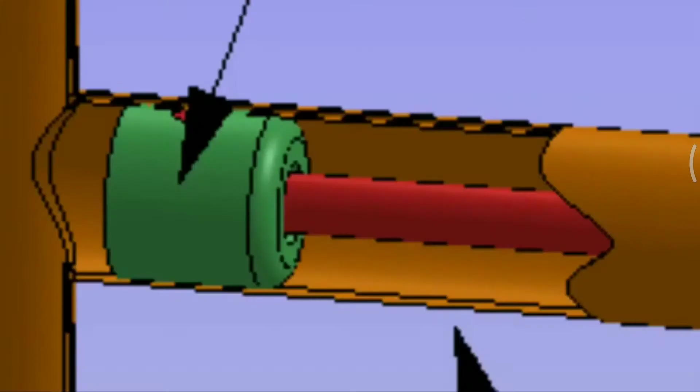Reciprocating pump is a positive displacement pump which comes in various varieties such as piston type pump, diaphragm type pump and plunger type pump. This type of pump is suitable where the low volume of flow and pressure is required to be high.

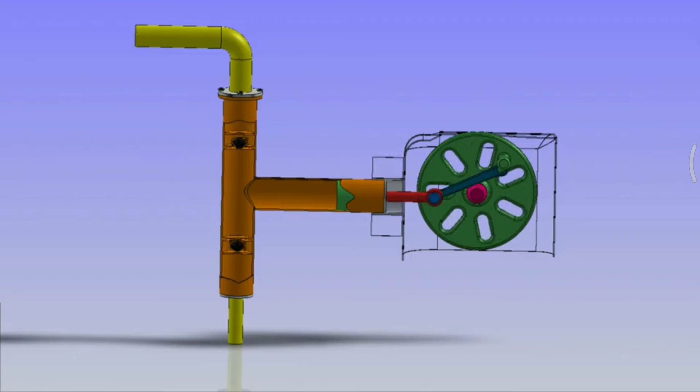This pump consists of suction pipe, suction valve, delivery pipe, delivery valve, cylinder, piston and connecting rod assembly, strainer and air vessel. Suction pipe connects the source of liquid to the cylinder, and the liquid is sucked by the pipe from the source to the cylinder.

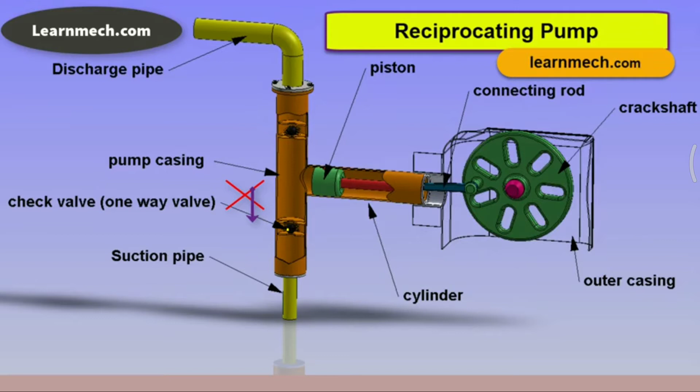Suction valve is a non-return valve, which means only one direction flow is possible in this type of valve. This is placed in between suction pipe inlet and cylinder. During suction of liquid it is opened, and during discharge it is closed.

Delivery valve is also a non-return valve, placed between cylinder and delivery pipe outlet. It is in closed position during suction and in opened position during discharge of liquid. This pump works on the principle of a slider crank mechanism.

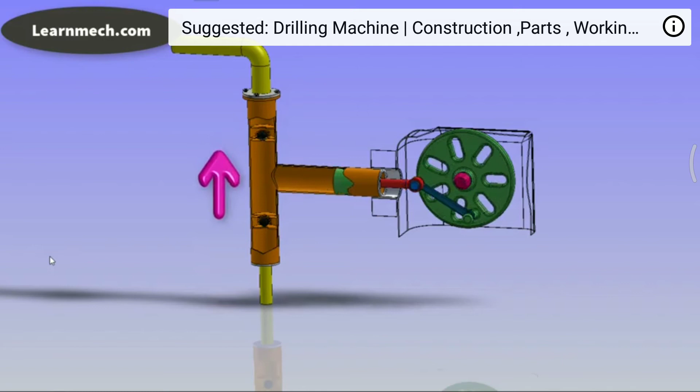Cylinder is used to suck water and deliver it to the desired location. The piston executes reciprocating motion within the cylinder. Piston is connected to the crankshaft through a connecting rod. An external power source is used to drive the piston within the cylinder.

As the piston moves backward, it sucks the liquid into the cylinder, and when it moves forward, it delivers the water from the cylinder to the required location.

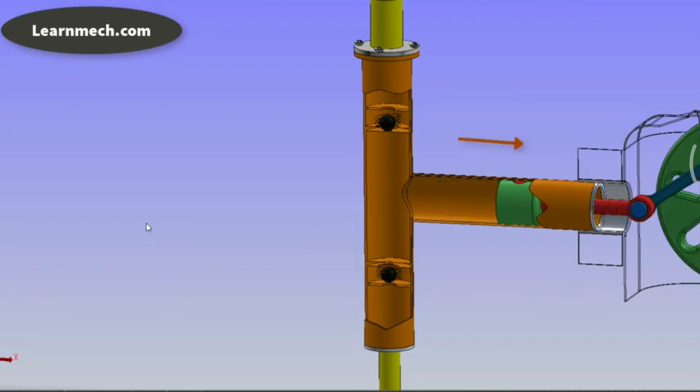During the suction stroke, the piston moves backward and opens the suction valve, making the water enter into the cylinder. During suction, the delivery valve remains closed and no water is discharged through it.

After the suction stroke, the piston moves forward. During this, the delivery valve gets open and the suction valve comes into closed position.

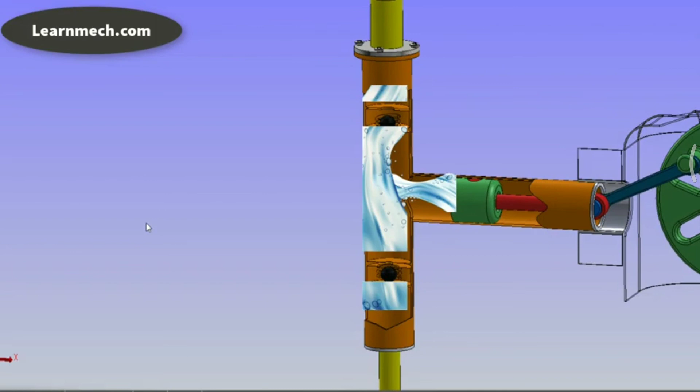As the piston moves forward, it applies thrust force on the liquid and the liquid starts escaping.